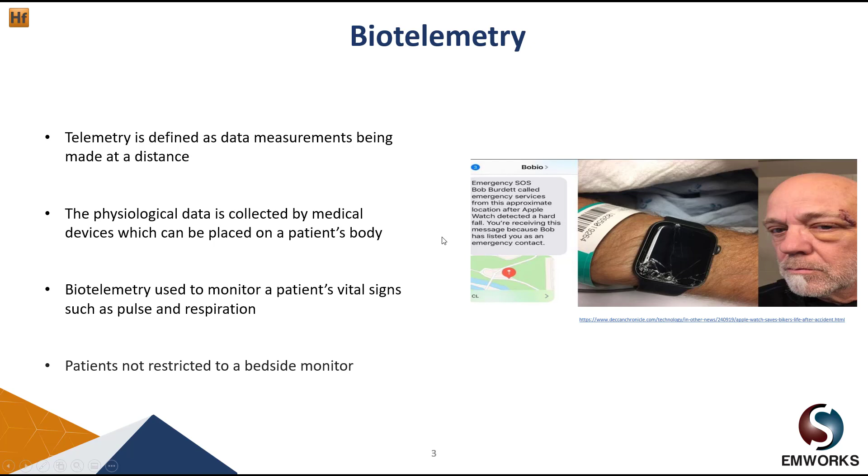In this image we can see a picture of a guy called Bob. In 2019, Bob had a serious face injury, as you can see from this image. Thanks to his Apple Watch, he was able to receive medical assistance in 30 minutes. From this incident, we can see the importance of biotelemetry.

So now we talked about biotelemetry. For biotelemetry, in order to send the data that is collected, it can be done wirelessly through the wireless body area network. So what is a wireless body area network? It is simply a network that is composed of low power micro and nanotechnology sensors and actuators.

It has several benefits. For example, it can allow the patient to be more mobile and active without wired devices. For instance, patients in the hospital can move out of their beds, move around their room, or even go out of the hospital for a while.

It can also allow physicians to get critical physiological measurements in the patient's natural environment. For example, if the patient is still moving, the physician can still receive the measurement.

In this image, we can see a patient that has the wireless body area network, composed of several sensors that are used to measure certain biological functions, such as temperature, blood pressure, electrocardiogram (ECG), heart rate, and respiration.

After that, the data are transferred wirelessly to a body control unit, or BCU.

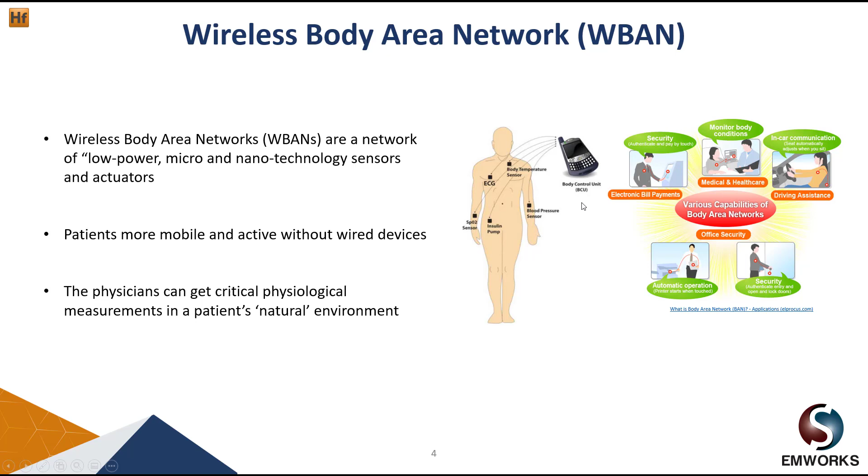So now we talked about biotelemetry and some of its advantages. Now let's talk about some of the design challenges. For each wireless system, of course, we need to have an antenna, and biotelemetry is no different.

Placing an antenna near a human body can have a great effect on its performance, and this is due to the dielectric loading. The human body is considered a large, lossy dielectric material and can have a big effect on the performance of the antenna.

The other thing is, we want the back radiation of the antenna to be as minimal as possible to avoid overheating or damaging the biological tissue. Of course, we want the antenna to be flexible and very small to make it more comfortable for the patient.

In order for the antenna to be safe for the patient, there are certain SAR limits which have to be followed. In this table, we can see different SAR limits set by the Federal Communications Commission, or FCC. For instance, for the partial body, it has a limit of 1.6 for uncontrolled exposure time, but for controlled exposure time, it has a limit of 8.

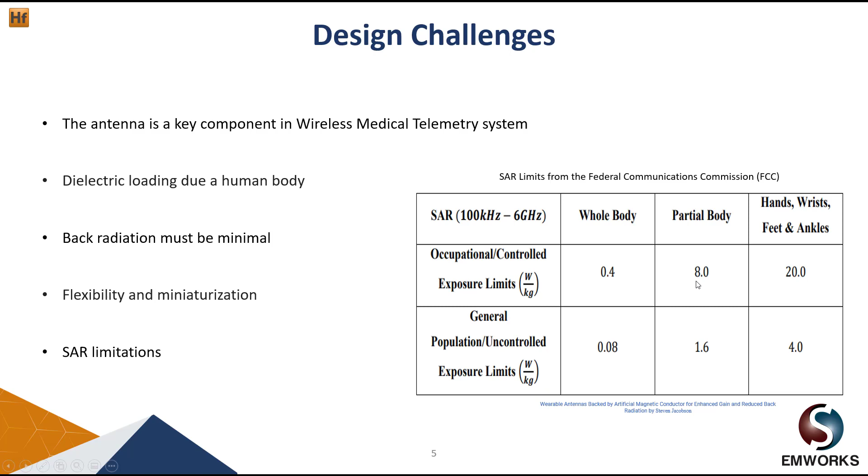Alright, so let's talk a little bit about some of the proposed solutions. In order to prevent the back radiation and also to enhance the gain, reflectors are used. For example, the reflector can help improve the gain as well as prevent the back radiation.

For the reflector, we can use a perfect electric conductor or an artificial magnetic conductor (AMC). For the perfect electric conductor, we need to place the reflector at a distance of a quarter wavelength. But the problem with this is that at low frequency, the quarter wavelength becomes very large, so the antenna becomes very bulky to wear.

As an alternative, we use what we call the artificial magnetic conductor. By using the AMC, the distance between the antenna and the reflector can be significantly reduced.

In this image, we can see the perfect electric conductor placed at λ/4 to have constructive interference. But the problem is that at low frequency we have a large distance, making the antenna very bulky. Instead, the artificial magnetic conductor is placed at a distance much smaller than the wavelength, making the antenna very small and comfortable for the patient.

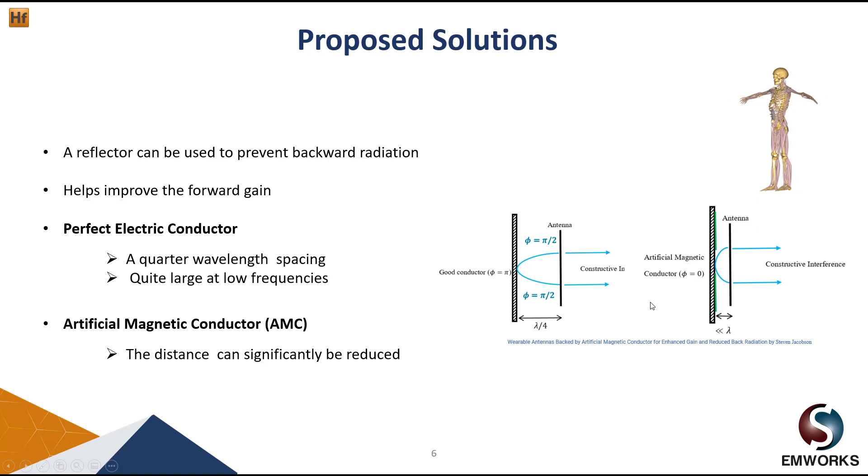This is some of the results we got using HFWorks. So first let's start with the return loss of the slotted dipole antenna. As we can see from this figure, the antenna resonates at 2.5, and this somehow matches the measurement. So at 2.5 the antenna has a return loss of almost minus 15 dB.

In the middle we have the picture of the mesh. On the right hand side we have the animation of the electric field at 2.5 gigahertz.

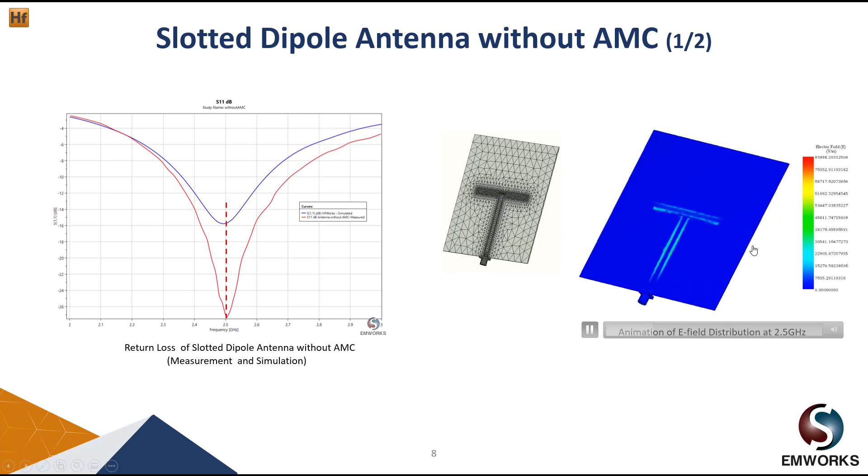In HFWorks we have what we call the antenna far field results table. Under this table we can see different antenna parameters, so for example we can see the maximum gain, mismatch efficiency, radiation efficiency, and total efficiency. So for our antenna we can see it has a gain of 4.7 and total efficiency of 96%.

At the bottom we have the 3D gain pattern of the antenna. From this plot we can see the antenna has a broadside radiation, and also we have some backward reflection.

Looking at the 2D radiation pattern, we can see that the antenna has some omnidirectional radiation, and again has the gain of 4.7. So for us we want to make the radiation unidirectional instead of omnidirectional. Also we want to minimize the back reflection.

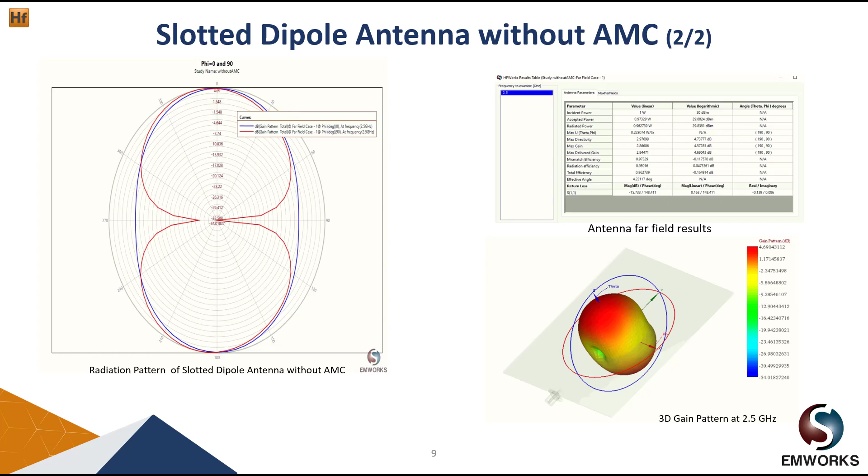Okay, so now let's see what would happen if we add the AMC reflector. So again we have the same slotted dipole antenna, but in this case we just added the rectangular patch AMC.

For the rectangular patch AMC, it has substrate material of Rogers 5880 with permittivity 2.2 and loss tangent of 0.0009. The height of this substrate is 0.8 millimeter. The spacing between the antenna and the reflector is 1 millimeter.

So for example, if we were to use the perfect electric conductor, at a spacing of quarter wavelength for the frequency of 2.5, it becomes 30 millimeter. So we can see here the importance of using AMC and how it can help reduce the spacing. In this example we almost decrease the spacing by a factor of 30.

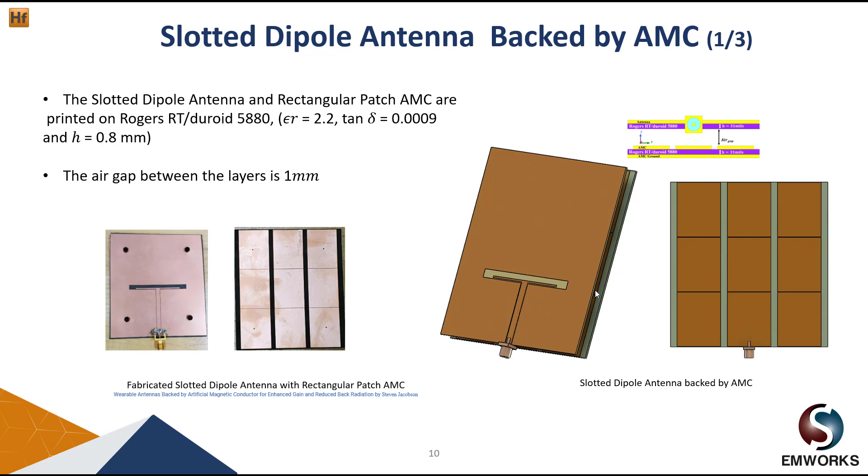So first let's look at the return loss of the antenna. From this figure we can clearly see there is a big enhancement in terms of the return loss. At the resonant frequency of almost 2.52, the antenna has a return loss of almost -26. From here we can also see there is a slight shift in terms of resonant frequency.

Looking at the antenna far field results table, we can see there is a big increase in terms of the gain. So the antenna has a gain of 7 dB and total efficiency of 97%. So we can see now the effect of AMC in terms of enhancing the gain as well as enhancing the return loss.

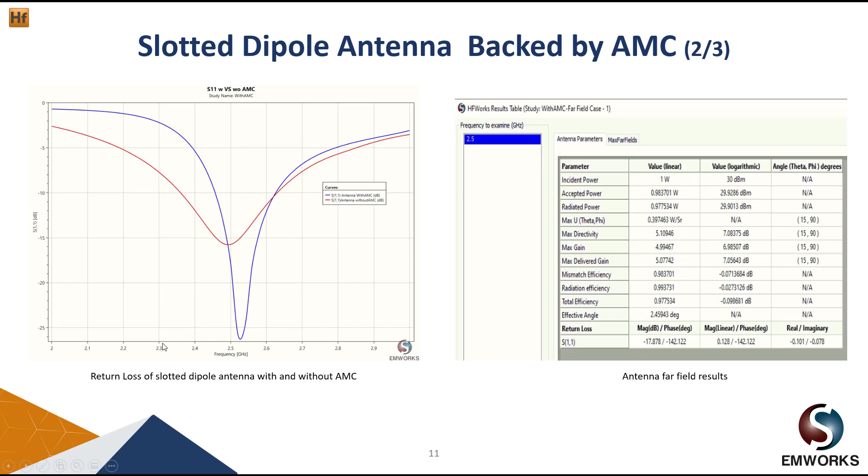By looking at the 3D gain pattern, we can see we now have broadside radiation, but now we have some backward radiation, though this is reduced as compared to the previous scenario.

By looking at the 2D gain pattern of both scenarios, with AMC and without AMC, we can see there is a big increase in terms of the gain pattern, and also the back radiation now gets reduced. Also now we no longer have the omnidirectional pattern, so we have unidirectional radiation. So again, AMC helps significantly reduce the back radiation and improve the forward gain.

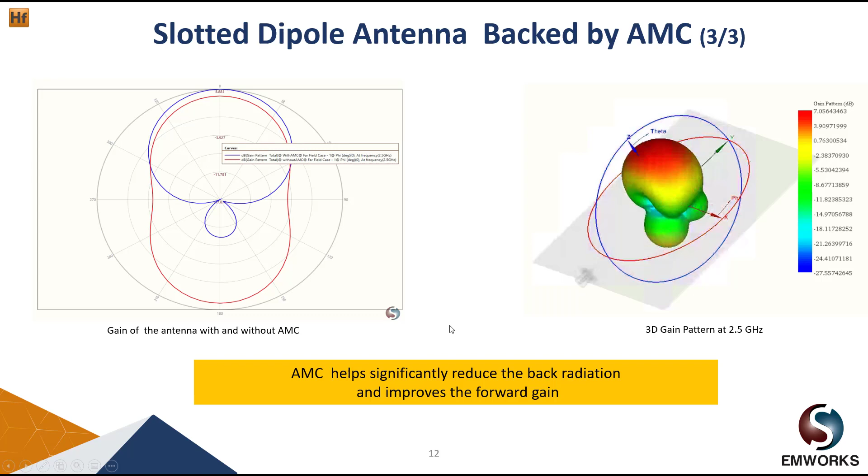Okay, so let's look at what would happen to the antenna when it's placed near the human body. As an example, we'll use the human arm. So from this picture we can see there is a human arm, and at a distance of 2 millimeter, there is the slotted dipole antenna.

Looking at the graph on the left, we can see there's a shift in resonant frequency and also a big effect on the return loss. At resonant frequency we have a return loss of almost -5 dB, so our antenna no longer operates as desired.

The reason for this is that now we have the human arm, which we can think of as the dielectric material, and this dielectric material affects the near field, which in turn can affect the return loss and radiation pattern.

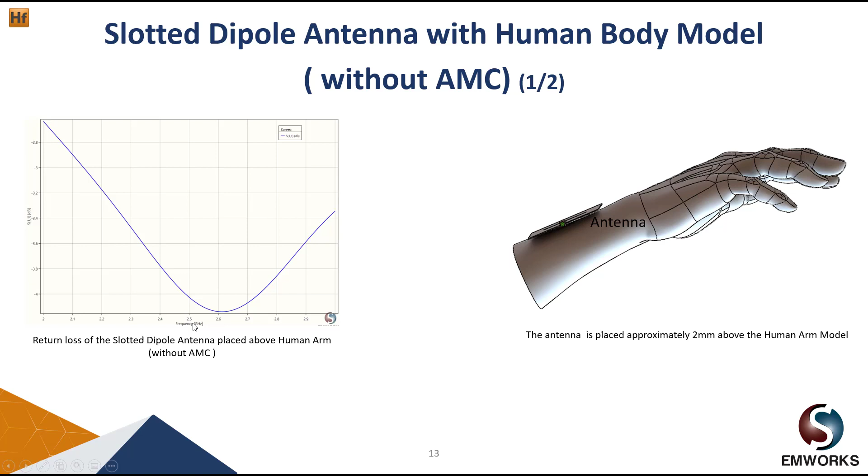So let's see what would happen if we add an AMC reflector. Again we have the same human body model, but now we've added the AMC layer. The antenna and the reflector are at a distance of 2 millimeters.

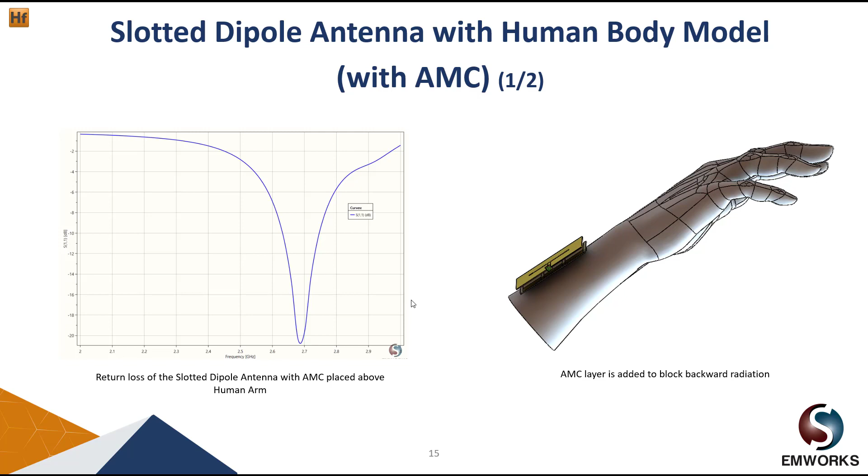From this figure we can see there's a bit of shift in resonance frequency, but also a big decrease in return loss. Previously the return loss at resonant frequency used to be -5 dB. Now at resonant frequency the reflection is almost -20 dB. So we can see the effect of the AMC and how it helps reduce the dielectric loading effect of the human body.

Let's look at the SAR. From this plot we can clearly see the SAR level is 0.03, far below the SAR limits, so the antenna is now safe for the patient.

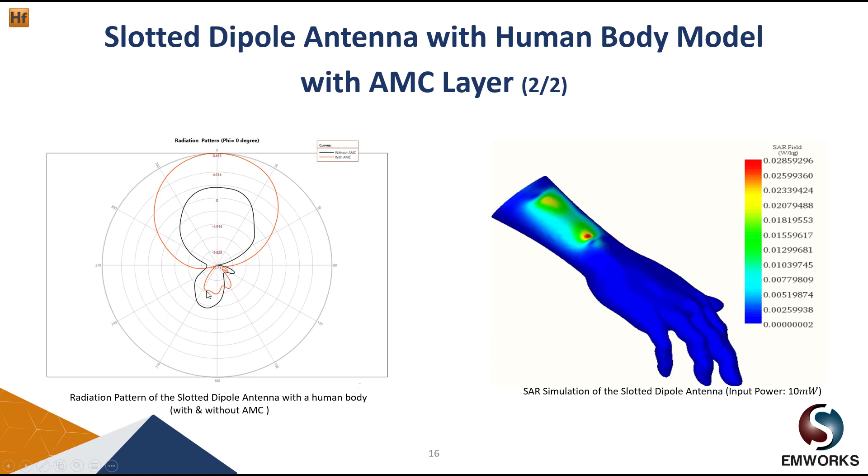Comparing the radiation pattern with and without AMC, we can clearly see a big increase in gain. Previously we had a gain of almost 2 dB, and now the gain is enhanced further to almost 8 dB. We also see a reduction in backward radiation.

Alright, so now we have a live demo. We'll be showing you how to design such an antenna using HFWorks.

This is HFWorks and this is SolidWorks. HFWorks is fully embedded in SolidWorks. Once you're done creating your geometry in SolidWorks, you can just go ahead and start your simulation in HFWorks. HFWorks is also gold certified by SolidWorks, so it's simply just a tab.

In HFWorks we have four types of study: antennas, S parameter, TDR, and resonance. Today we will focus on the S parameter.

In HFWorks, for almost each study we have three main steps. The first step is to define the accuracy, the frequency range, and the meshing, manual or adaptive. If you know how to use the mesh, you can use manual, otherwise you can use adaptive and the software will figure it out for you. You can also do the thermocoupling.

The next step is to apply material. To apply material, you just right click and say apply material. We have different materials under the material library, and also different materials from different vendors, for example Mitsubishi, Rogers, and so on.

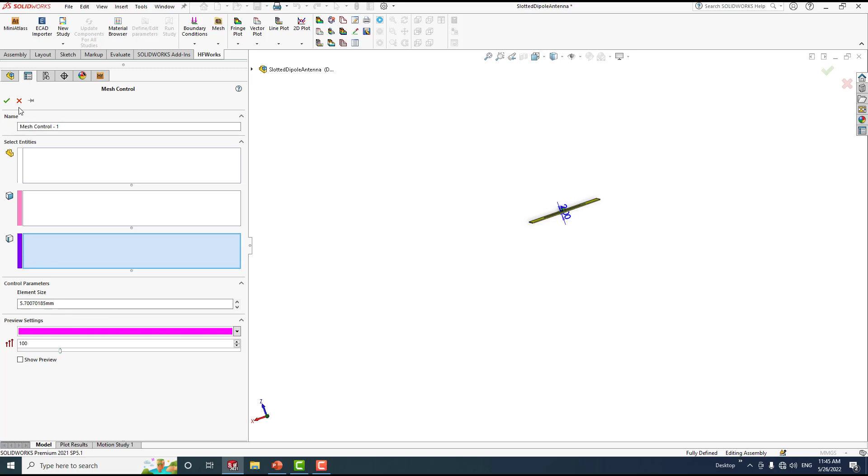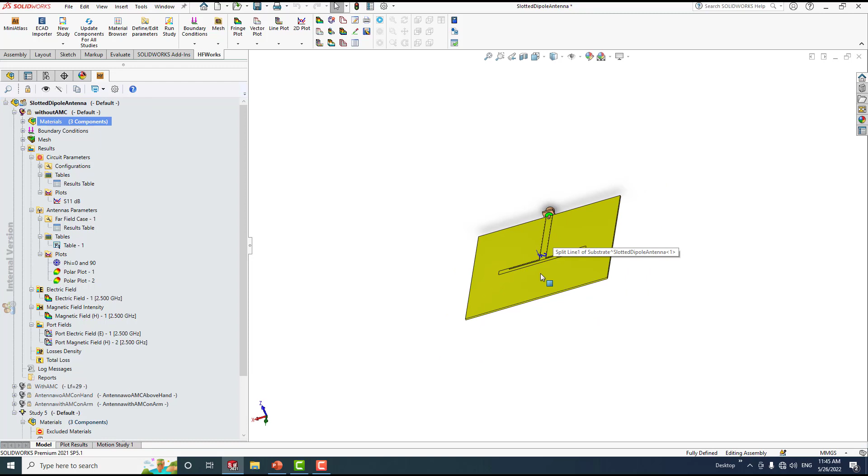Alright, so let's talk a little bit about the slotted dipole antenna. This is our antenna, basically a slotted dipole antenna. This is the connector, and this is the mesh of the antenna.

In HFWorks we have what we call the results table. In the results table we can see different circuit parameters such as generalized S matrix, renormalized S matrix, impedance matrix, admittance matrix, port result, and VSWR. You can plot versus current frequency or frequencies, and also export results to different formats such as text file, CITI, SPC, or touchstone.

So let's look at the return loss. From this figure we can clearly see that the antenna resonates at 2.5 with a return loss of almost -15 dB, and this corresponds to the measurement.

Let's look at the antenna results table. In HFWorks we have the antenna far field results table, under which we can see different antenna parameters such as maximum gain, mismatch efficiency, radiation efficiency, and total efficiency. In our case, our antenna has a maximum gain of almost 4.7 and a total efficiency of 96%.

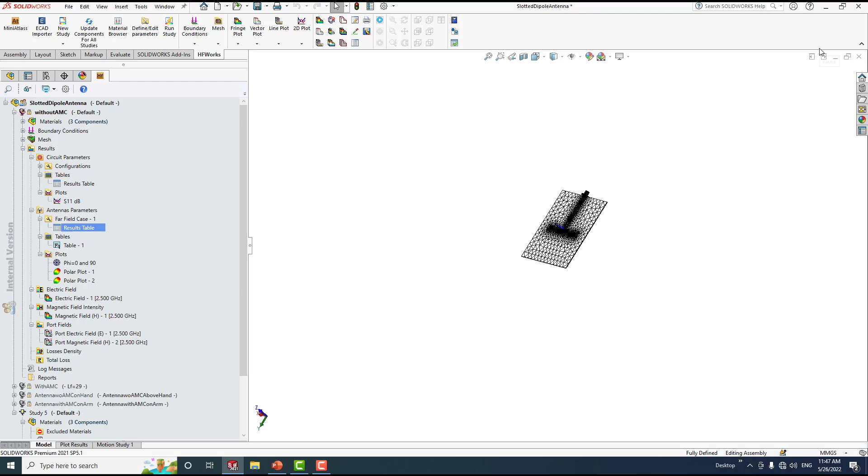So this is the 2D radiation pattern. We can see now the antenna has a kind of omnidirectional radiation. Our aim is to have unidirectional radiation, and we want to minimize the backward radiation.

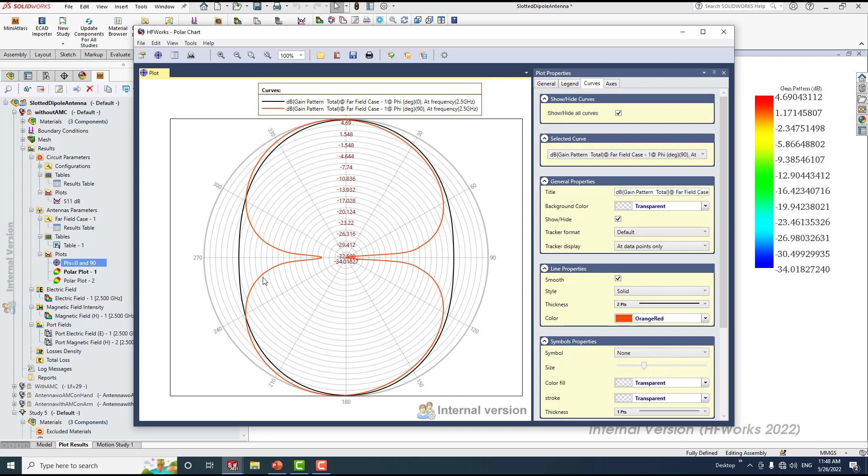Let's look at the electric field distribution. In HFWorks we can see the electric field distribution as well as the magnetic field distribution. We can even animate the electric field, so from this you can clearly see the animation of the electric field.

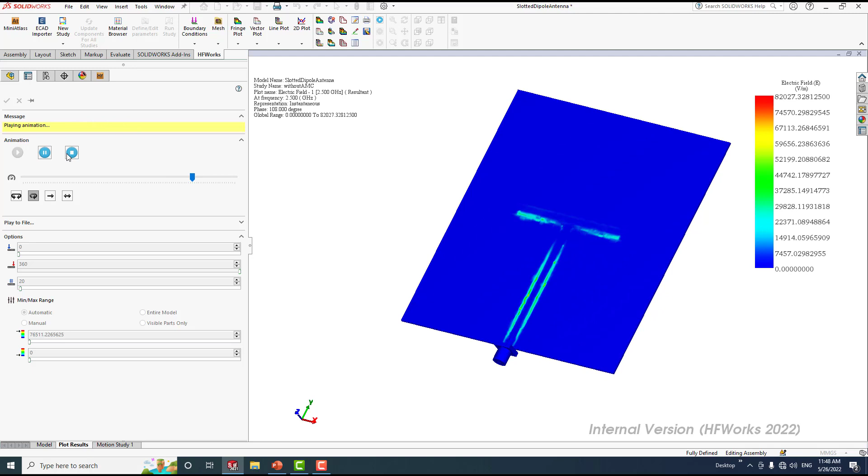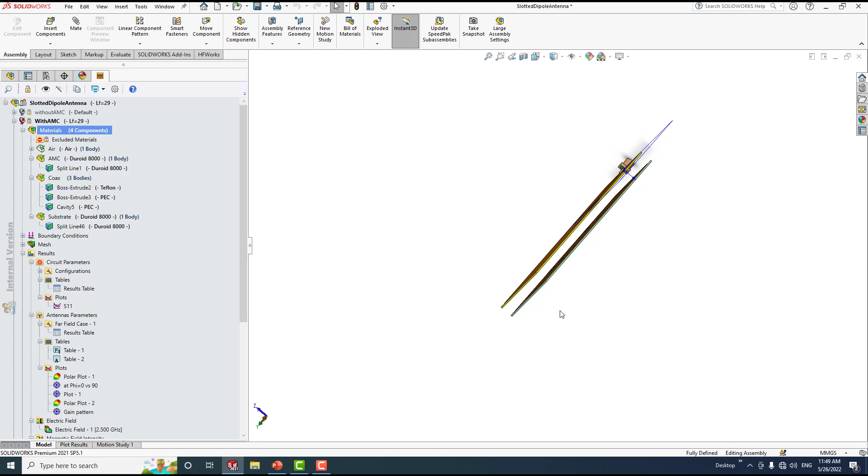Alright, so let's see what would happen if we add the AMC reflector. This is the slotted dipole antenna, and underneath it we have the AMC rectangular patch. The spacing between the two is 1 millimeter.

Let's look at the return loss. From this figure we can see there is a slight shift in terms of the resonant frequency, but there is a big enhancement in terms of the return loss. We can see the return loss reduced from almost minus 15 dB to almost minus 26 dB. So now we can see there is a big effect of the AMC in terms of the return loss.

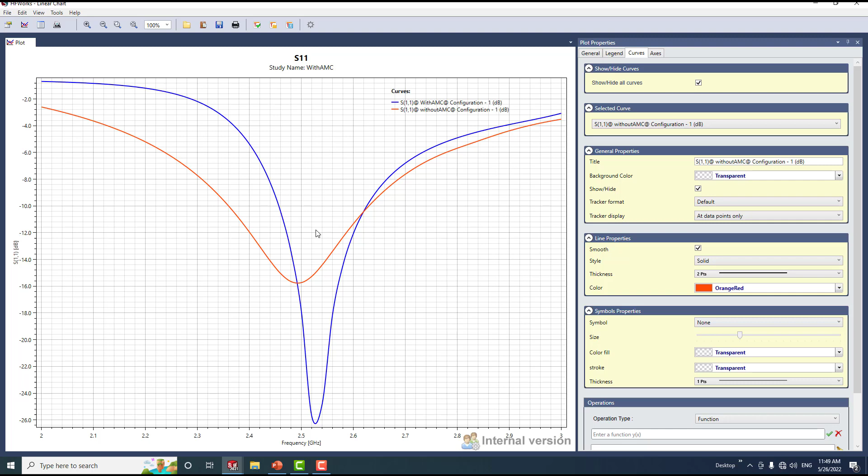Looking at the far field results table, we can clearly see that the antenna has a maximum gain of 7 dB and total efficiency of 97%. So let's look at the 3D gain pattern.

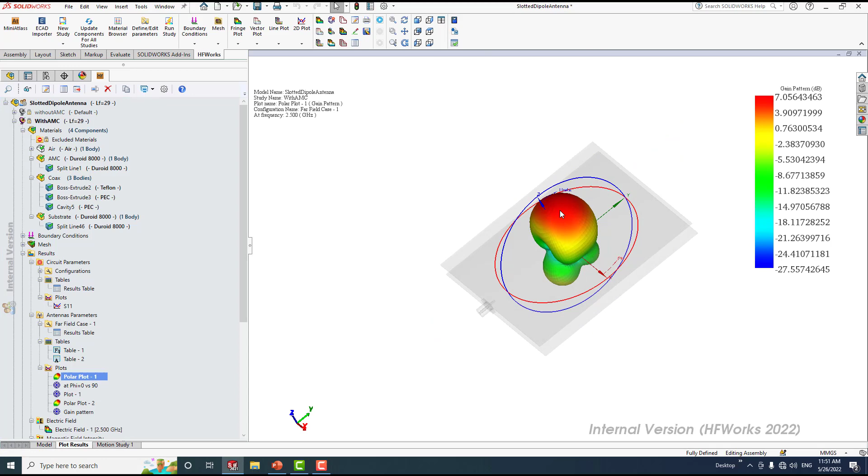So here we have the broadside radiation and some of the backward radiation, but now it gets reduced.

Looking at the 2D gain pattern, we can see there is a big increase in terms of the gain, and also the backward radiation gets reduced as compared to the case without AMC.

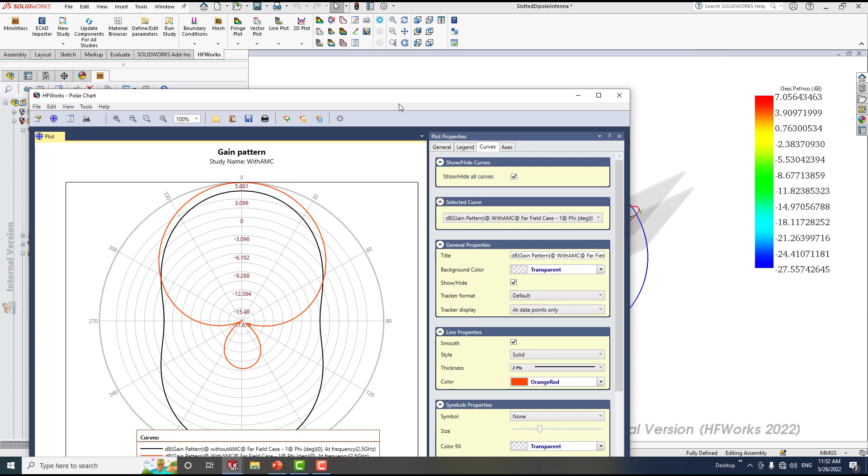Alright, so let's see what would happen if we put the antenna beside the human body. This is the human arm. At a distance of 2 millimeters, we have the slotted dipole antenna.

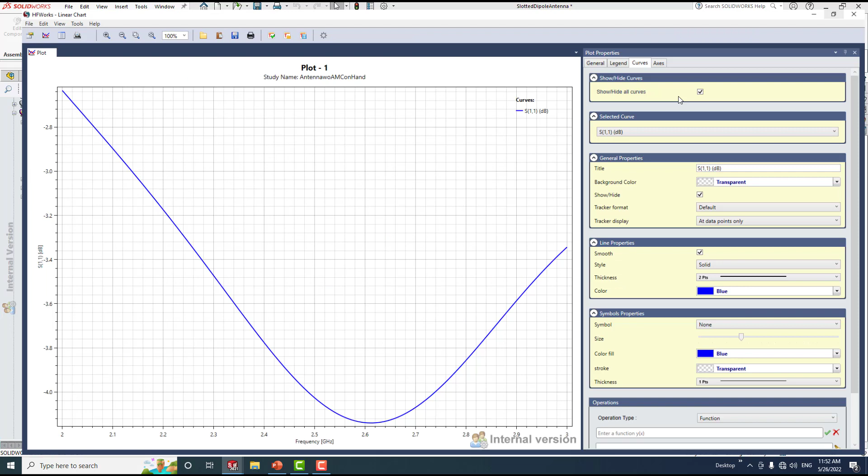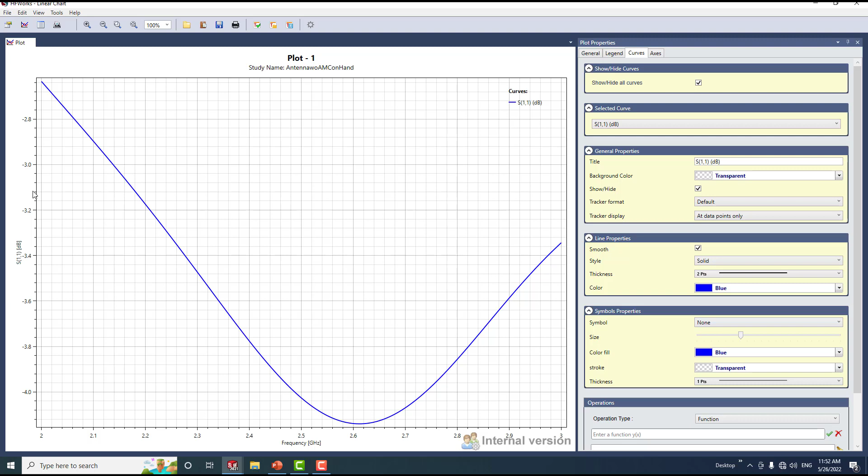From the return loss, we can clearly see there is a shift in terms of resonant frequency, and also we can see now at resonant frequency the return loss gets decreased to minus 4 dB. So our antenna no longer operates as desired.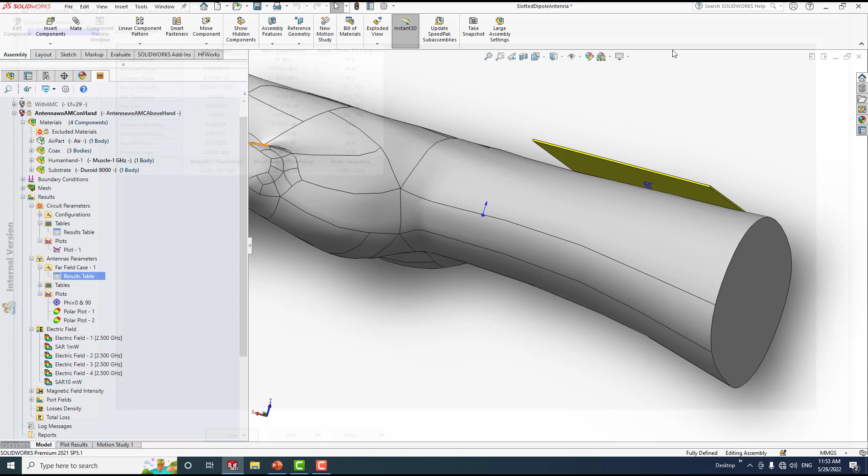Okay, so let's look at the SAR level. From this figure, we can see that the SAR level exceeds the standard limit of 1.6. So from here we can see that the antenna is no longer safe for the human body.

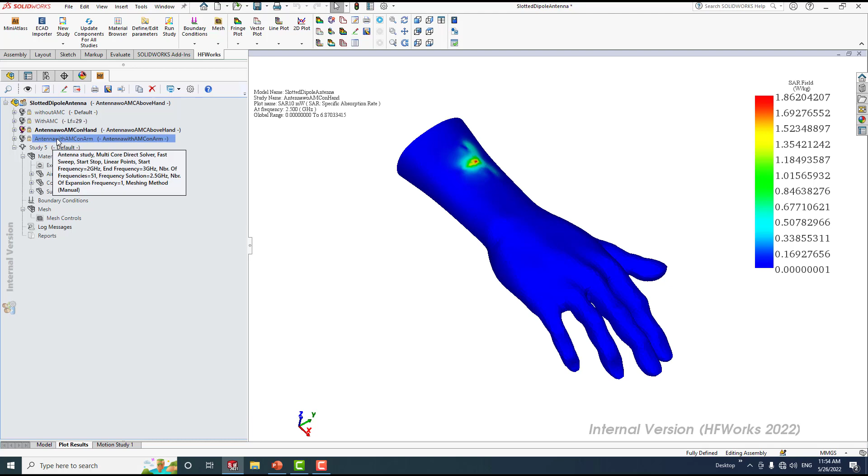Alright, so let's see what would happen if we now add the AMC layer. Again, we have the antenna and the AMC layer that are 2 millimeters away from the human arm.

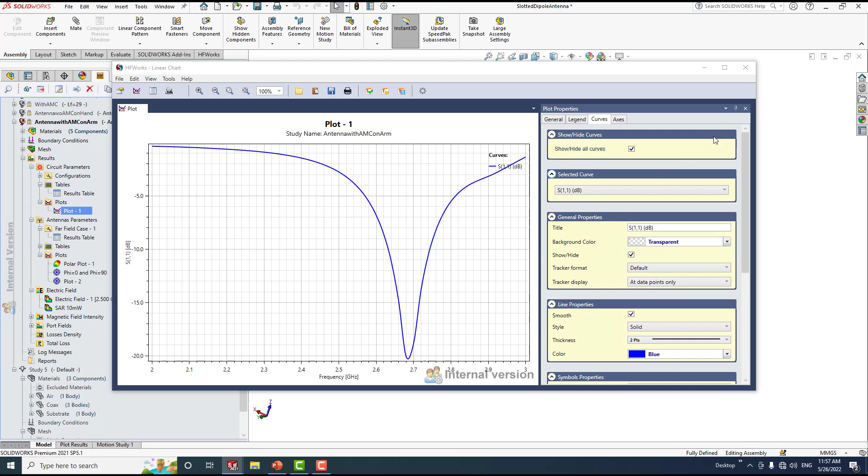Looking at the return loss, we can see that the antenna has a bit of shift in terms of the frequency. So now the antenna resonates at almost 2.68, and at the resonant frequency we have a return loss of minus 20 dB. So you can see there's a big enhancement in terms of the return loss.

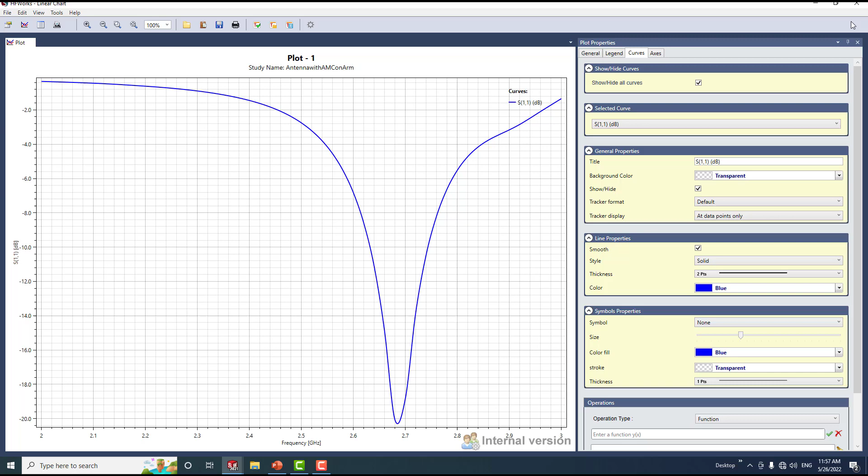Looking at the far field results table, we can see that the antenna now has a maximum gain of 8.6, so you can see there is a big increase in terms of the gain, and the antenna has a total efficiency of almost 43%, and this is still within the standard limit.

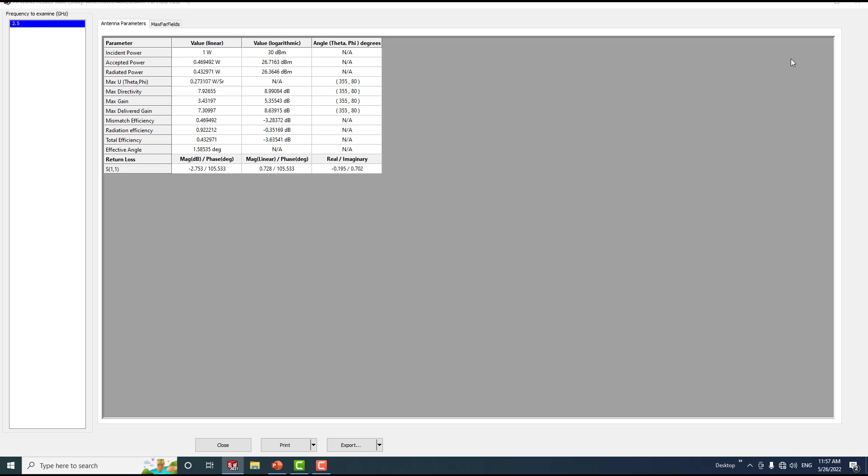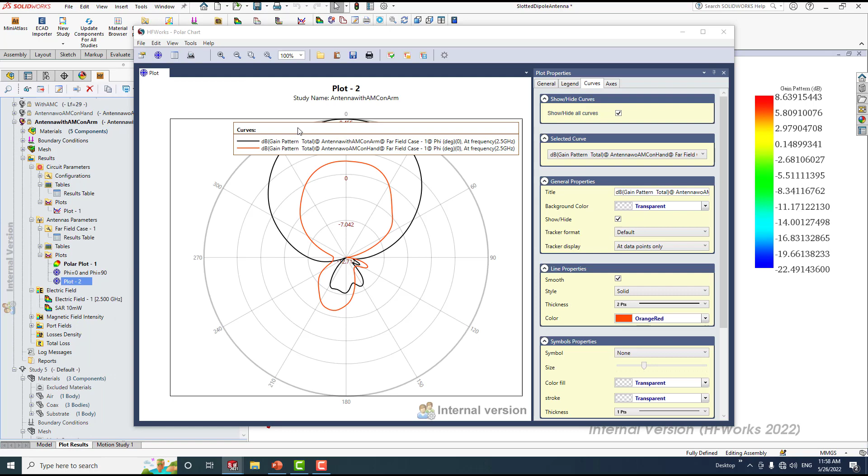So by comparing both the antenna with and without AMC, we can clearly see there is a big increase in terms of the gain, and also the back radiation gets reduced, and this is because of the AMC.

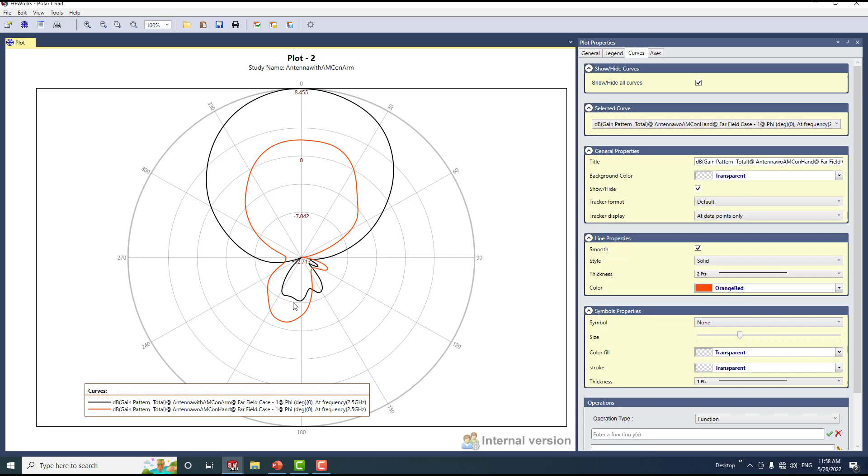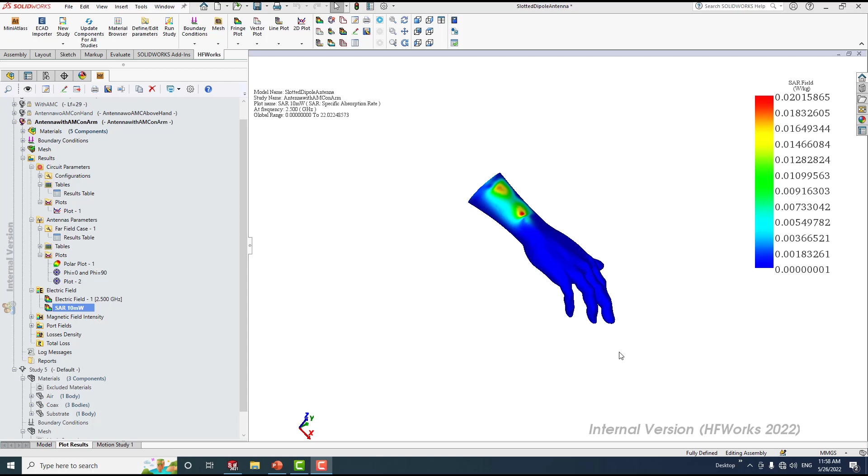Alright, so now let's look at the SAR level. From this figure we can see now the SAR level is far below the standard limit of 1.6... so now the antenna is safe for the human body. In our case it's the human arm.

Here comes the end of the live demo.

To summarize, we have seen the importance of using artificial magnetic conductor and how it helps minimize the back radiation and improve the forward gain. AMC can also reduce SAR level to the standard limit. We have demonstrated how easy and powerful HFWorks is and how it helps designers ensure antennas are safe, efficient, and comfortable. So with that, I would like to thank you, and now the floor is open for questions.